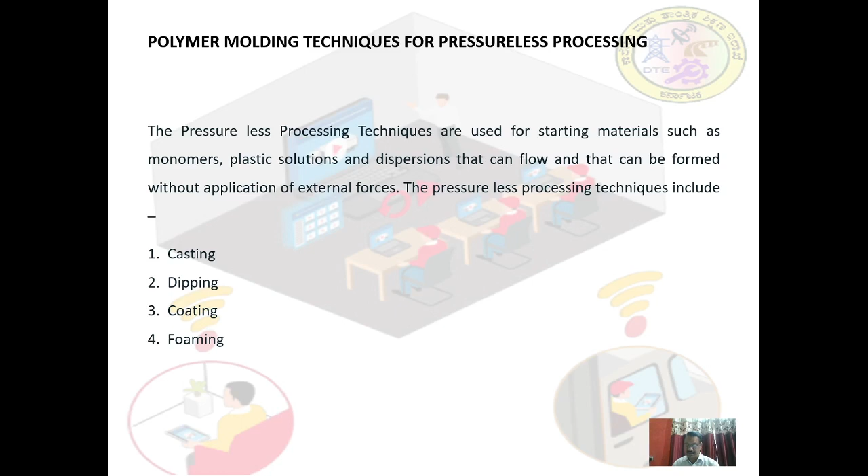You can see the machine used for casting. The mold is rotated about two perpendicular axes. Here is the mold, this is a drive shaft, and this is a motor. It is driven by this motor about two perpendicular axes, and this enables uniform wetting of the cavity surface. Rotational casting has the advantage of low investment cost over

slush molding. In the manufacture of thick-walled symmetrical structures such as pipes and sockets, centrifugal casting may be used. A partially filled mold is rotated rapidly about a central axis. Centrifugal force presses the material outward into the mold, and in the process the material gets compacted. This is about cast molding.

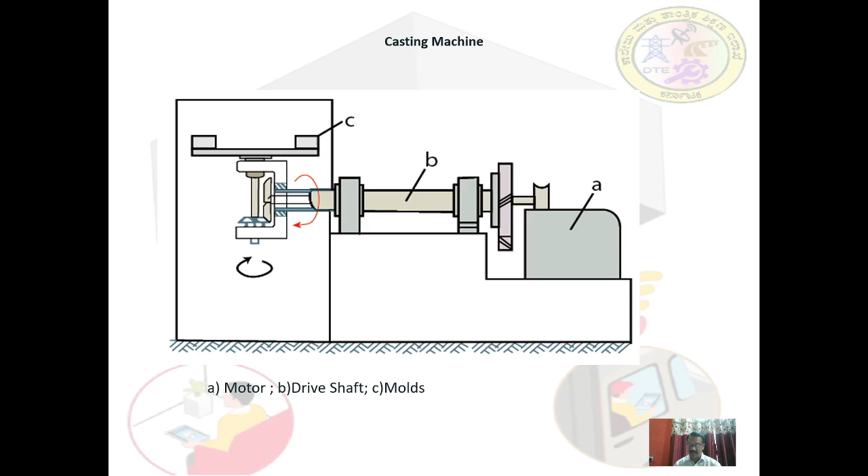The next type of molding is dipping. This is the unit used for dipping. There is a vessel A. This is the vessel into which the plastic material is taken, PVC paste here, the dipping frame, and these are actually the molds. Sometimes molds or articles are dipped into solutions, dispersions, pastes, melts, or powders. Later on, the adhering material on the surface is solidified by heat treatment.

For the manufacture of articles such as gloves, boots, etc., in which one side remains open, the positive mold is immersed. Subsequently, the cast is gelled. A series of identical molds mounted on the dipping frame are used for the mass production of such articles. During the dipping process, degassed PVC paste is placed in the vessel, which is raised or lowered. The dipping frame can be raised or lowered. Sometimes the dipping frame is moved while the vessel is stationary.

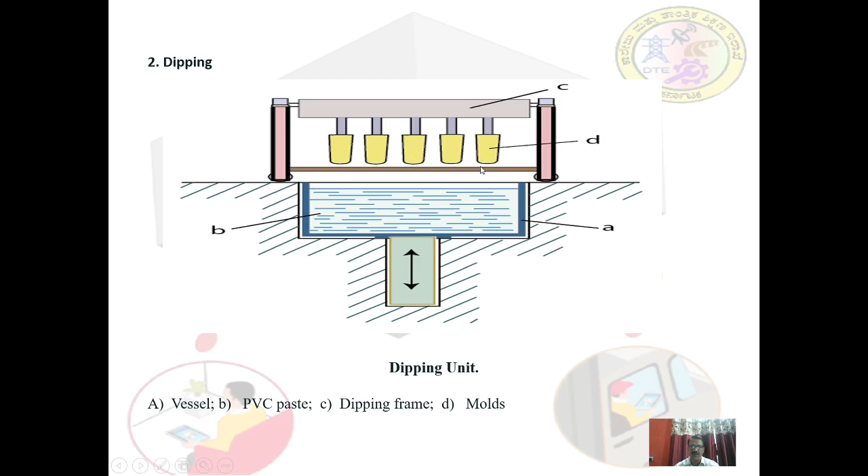Third one is coating. The coating unit is like this. A is actually a universal or unwinding station. B, expander. C, coating head. D, gelling tunnel, this one, and E is cooling rolls and rewind station. These are the parts of the coating unit.

It is working like this. In this process of coating, it is used for production of self-supporting film by coating sheet material such as paper or textiles. The most important materials that are used for production of coatings are PVC paste. The equipment for coating consists of an unwinding station, an expander, coating head, gelling tunnel, cooling system, and a rewind station.

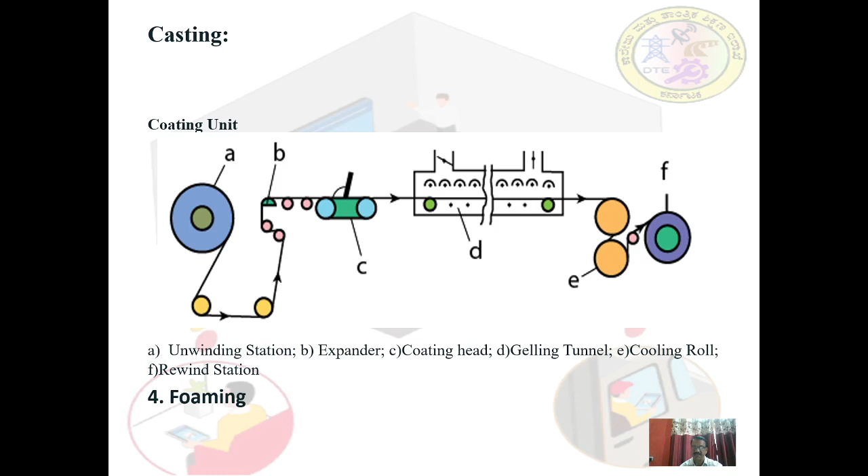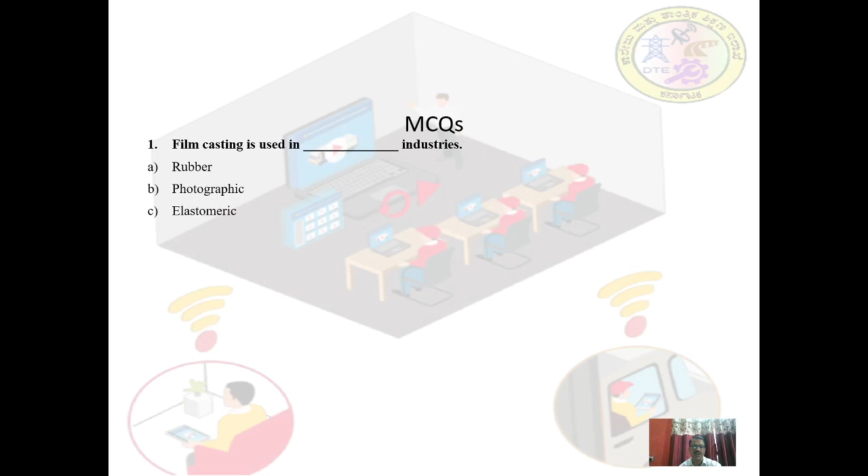Next, we'll see some of the MCQs. Question number one. Film casting is used in dash industries. Option A, rubber. Option B, photographic. Option C, elastomeric. And D, none of these. Answer is option B, that is photographic industry, in the manufacture of photographic film.

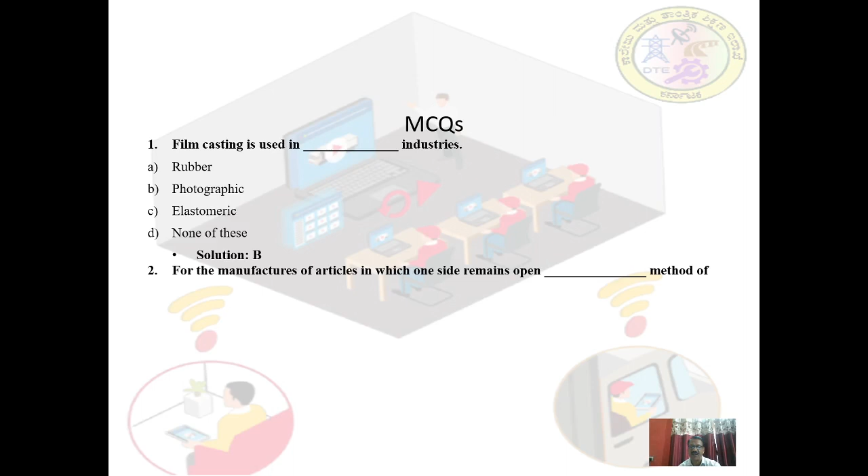Question number two, for the manufacture of articles in which one side remains open, dash method of molding is used. Options are A, casting, option B, coating, option C, dipping, option D, foaming. Right answer is option C, that is dipping method.

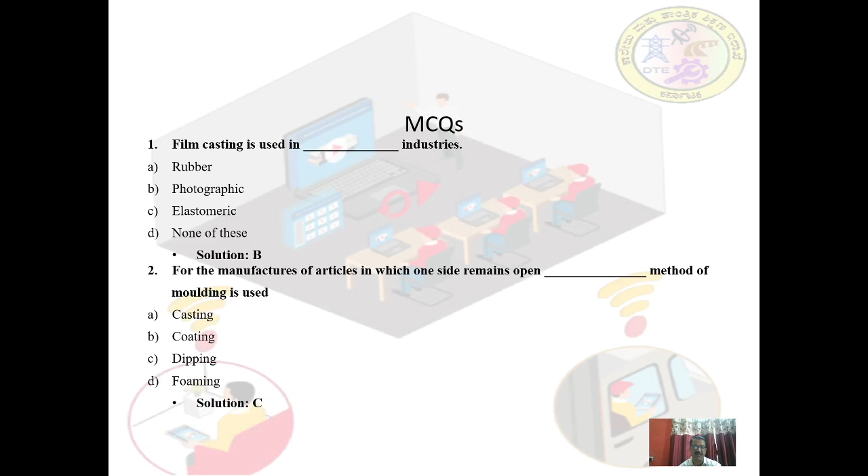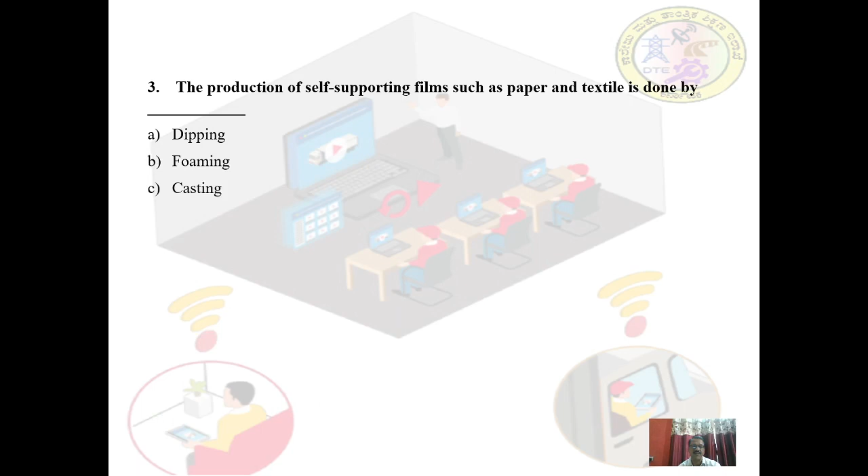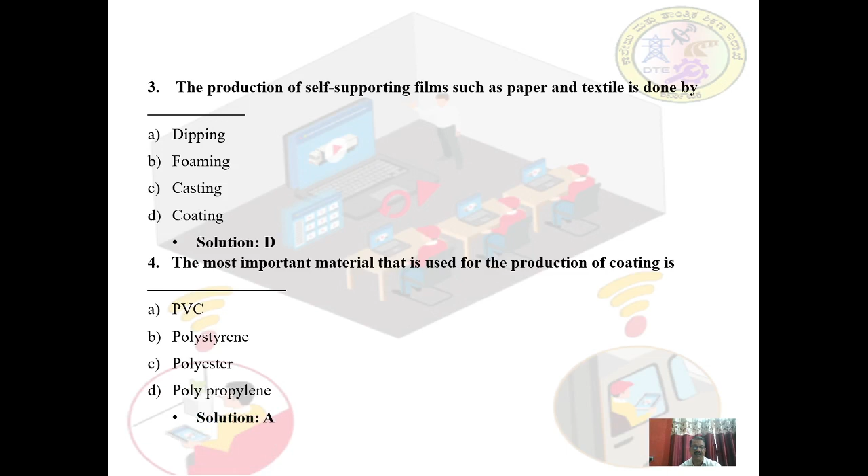Question number 3. The production of self-supporting film such as paper, textile is done by dash. Options are A, dipping, B, foaming, C, casting, and D, coating. Right answer is option D, coating. Question number 4. The most important material that is used for the production of coatings is dash. Options are A, PVC, B, polystyrene, C, polyester, option D, polypropylene. The right option is option A, PVC, polyvinyl chloride.

Question number 5. Cables and wires are extensively coated by insulating material by dash method. Options are A, foaming, option B, casting, option C, dipping, and option D, none of these. Right answer is option C, by dipping.